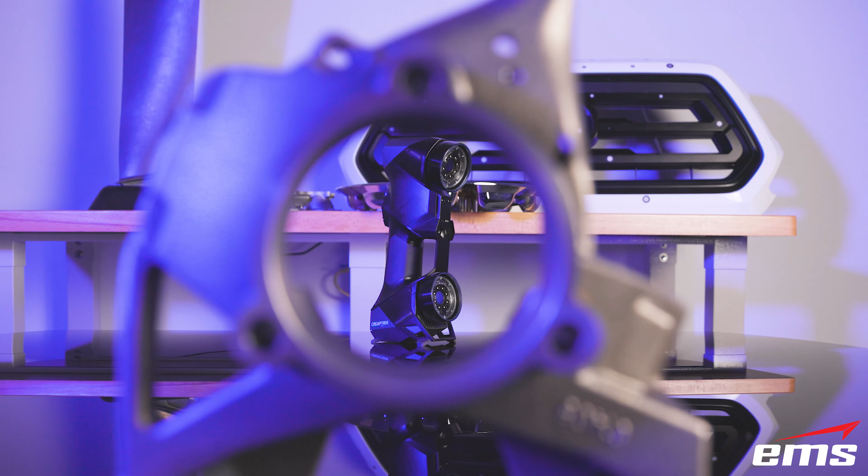So what do I mean by a real part? Well, if you go out on the internet, you see a lot of people doing demos and they're scanning widgets and statues and all kinds of stuff that companies that are doing manufacturing or design, they're not doing that kind of stuff. And the other thing is, most of them just show the scanning, they don't show the modeling or generating an inspection report. So what I want to do today is I want to show the entire process, and we're going to do it on this part.

And I call this a real part because this is out of a Jeep. It's a steering knuckle. And it's got some prismatic shapes, but then it has a lot of free-flowing organic shapes, and those have to blend into some of these planes and cylinders and so forth. So it's actually a pretty tricky part to model. And we're going to show you how to model this entire thing as a sketch-driven, feature-based, solid model, and then we're going to generate an inspection report with full GD&T.

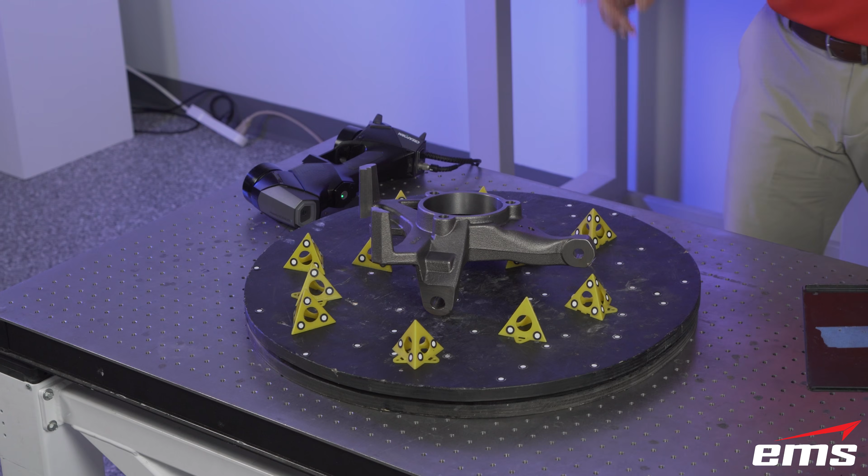Now, the other thing to make this even more complicated is we're going to change the manufacturing process. What do I mean by that? This part was forged or cast. We're going to CNC machine our part. So we've got to change up some of the things as we reverse engineer this part. So that adds another layer of complexity to it. But we're going to walk you through and show you what it takes to go from scan to CAD to inspection. And we're going to take you through that entire process.

So starting with the 3D scanning itself, we're going to use the Creaform HandyScan Black, but there are a lot of scanners you could use for a part like this. We're going to use the HandyScan Black because of the accuracy it provides and the ability to do dark and shiny surfaces on something like this. And we're not going to spend a lot of time on the scanning because we have lots of videos that show scanning, show this scanner in detail and other things. But let's just go ahead and start and get this scanning going.

I'm using this little Lazy Susan or rotary table that allows me to move around the part. All scanners or most scanners are line of sight. So we're just going to move around and get as much of this. And then when we're done, we'll flip the part over. The little yellow triangles are just there. This scanner requires targets, so as I lean down, it still has targets to see, but there's also targets on the table itself. But you can see it doesn't take long to scan this part.

It has this single line mode that allows us to get down into some of these smaller holes, and then I can switch back to the 22 line mode at any time. This is blue laser technology, so as I mentioned, very good on dark and shiny. And this scanner has a very good ISO certified accuracy. And again, if you want to see a lot of detail on this scanner, we have some great videos. But you can see the scanning does not take long on a part like this. That's pretty good. Now what I'm going to do is stop scanning. We're going to flip the part over and then scan the other side.

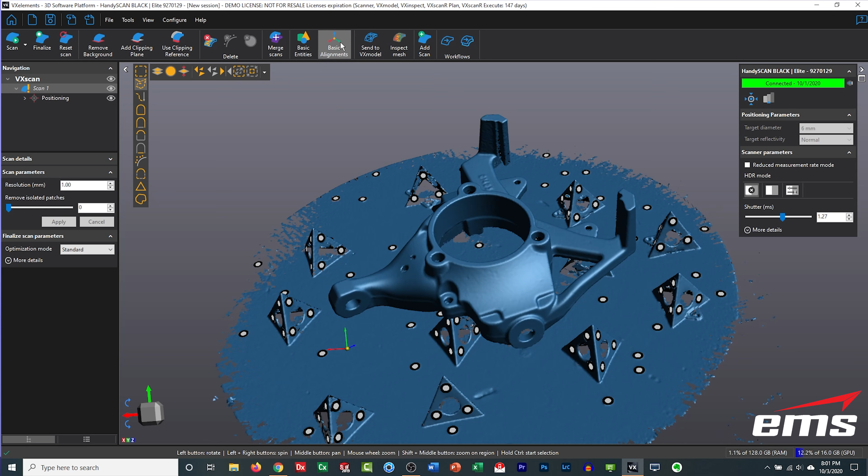So these triangles just kind of help hold the part from moving around. We don't want it to move around because we have no targets on this part. We've just got targets around the part. So then we come over here in the software and we just tell it we are going to add another scan. We do not want to copy the positioning targets because some of them got moved around a little bit. We hit start scan and off we go. Okay, and we'll get this side.

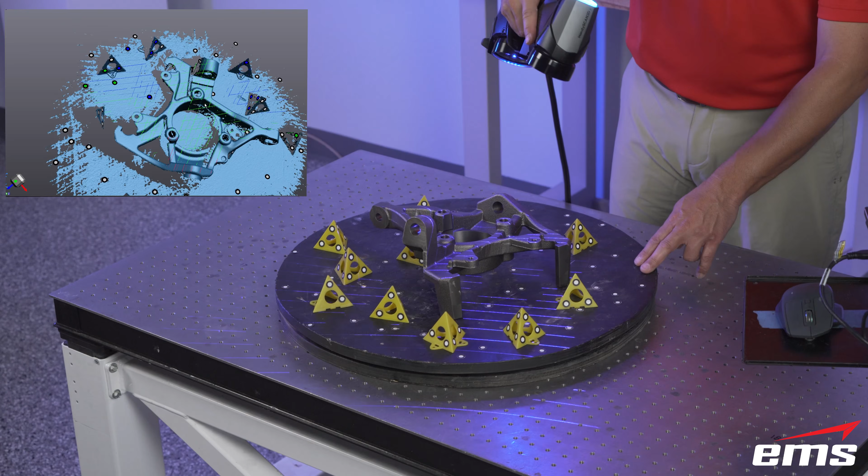And you can see there's some decent complexity on this part, especially on the other side. There's a lot of organic surfaces, but even on this side we've got some shape to it, because these parts are typically cast or forged and then machined. So there are some critical surfaces, especially all the machined ones. We want to make sure we get those really well and then get into, again, any of these holes in that single line mode. That's just going to be able to scan down in there deeper, especially the smaller they get.

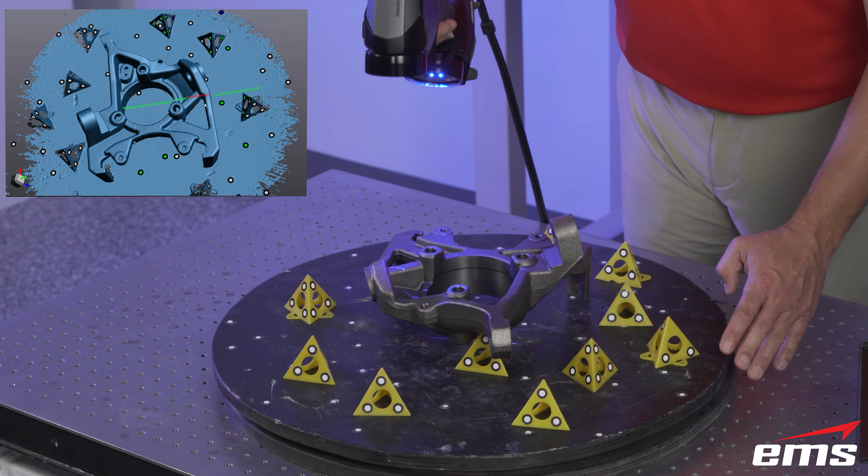But you can see, in a matter of a few minutes, we can scan this part. It's not difficult to scan, and that's the thing. These scanners nowadays are getting so fast and so good and so accurate that scanning has really become a very small percentage of a project. It might be now 10 or 20% of the project. The real work is in the modeling and generating the inspection reports.

So a part like this, which we're going to show the modeling next, is really where the work is. And then same for the inspection. Are you just doing a basic first article, or are you doing a very detailed inspection and have lots and lots of call-outs? That's where the real work is, and that's what we're going to get into next.

But we'll show you how to clean up this scan data, put the two halves together, because we've done it in two separate scans. We'll show that next, but then we're going to really focus on what does it take to turn this into a feature-based solid model that I can then use for downstream manufacturing applications.

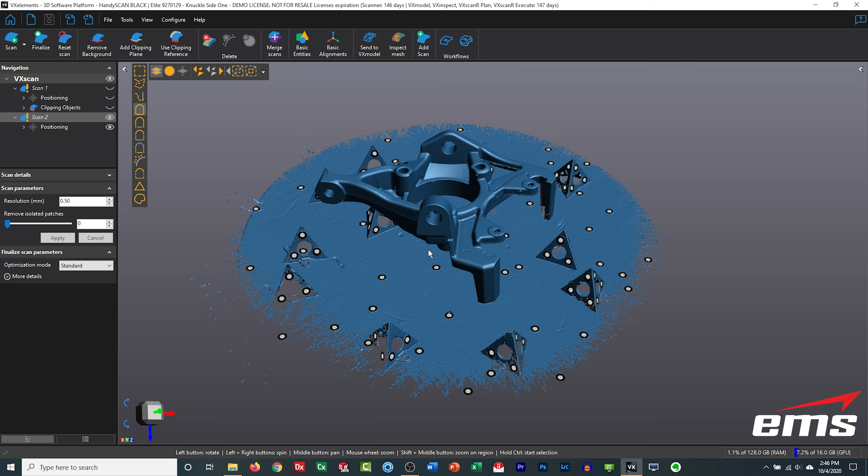All right, so here in the Creaform software, you can see our part here. First thing I want to do is get rid of all of the data we don't need. There's a command in here called remove background that basically finds the table, the flat surface, and it's going to create a clipping plane and clip that off. Okay? And now I'm going to just select the part itself, invert the selection, and then delete all the rest of the data.

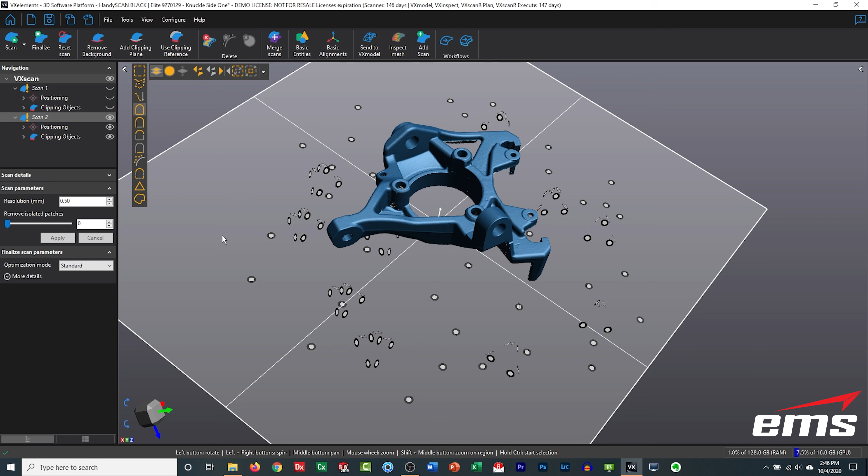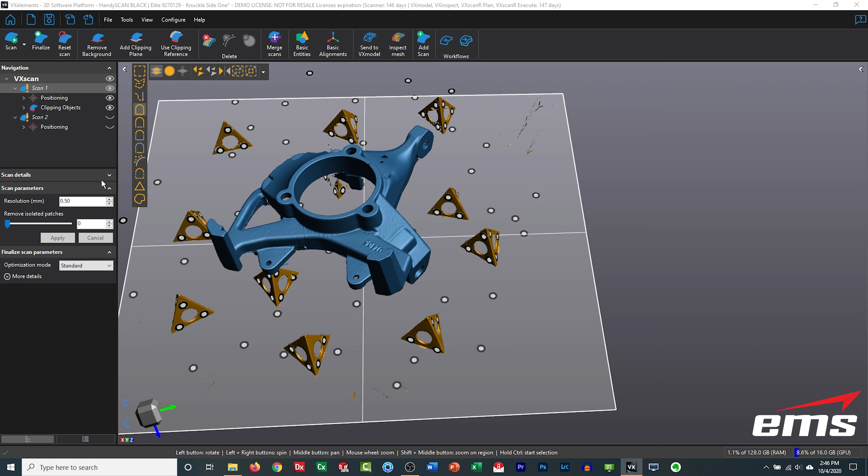And now we can get rid of that clipping plane. We don't need it anymore. That's just a quick way to get rid of a lot of the data. And let's go to the other scan. We've already created that clipping plane. So let's go ahead and select this, invert the selection, delete all that data. And then we'll also get rid of that clipping plane.

So now we have the two sides. So what we want to do is align them and then merge them. And it could be two sides, it could be 3, 4. It just kind of depends on how many sets of data. Typically it's a couple, but sometimes we have to do 2 or 3 depending on the part.

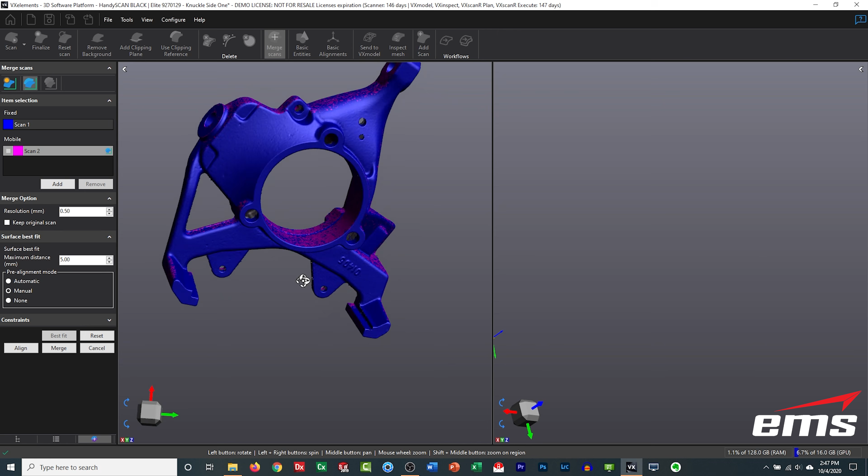So I'm going to use the manual method, and what you do is you just put them in the same orientation, and then you pick some points on each one. They just have to be close, and that just gives the software a head start, gets them fairly closely aligned. Now you do a best fit. It's going to go in there and really figure it out. You can see now we have a nice overlap between these two, and then we hit merge, and it's going to merge all that scan data together.

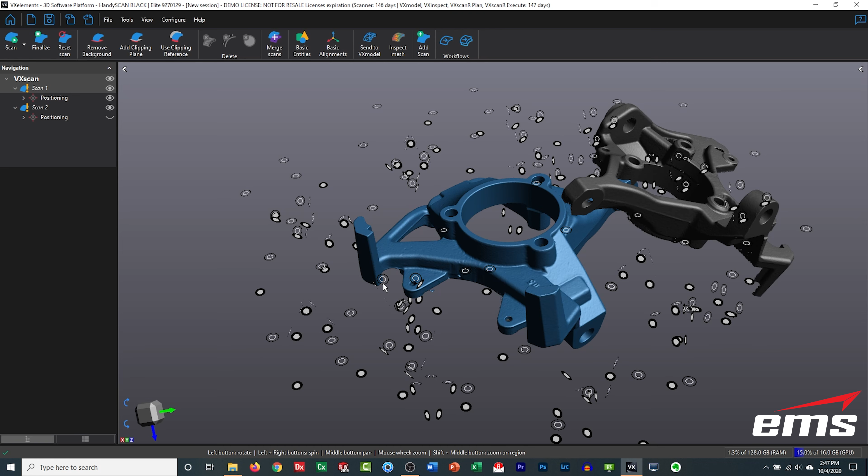So again, the time to scan and manipulate this data and get it to a point where it's ready to model does not take very long on a part like this. It's just a matter of a few minutes. Let's hide the original one there, and let's just hide our positioning target. So you can see we got very nice looking data. Only took us a few minutes, and this is about all we need. We're ready to go for the next step, which is the actual modeling.

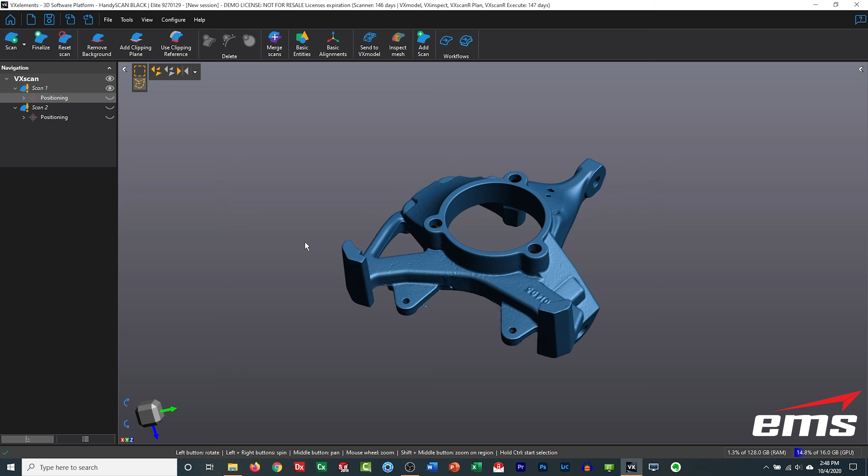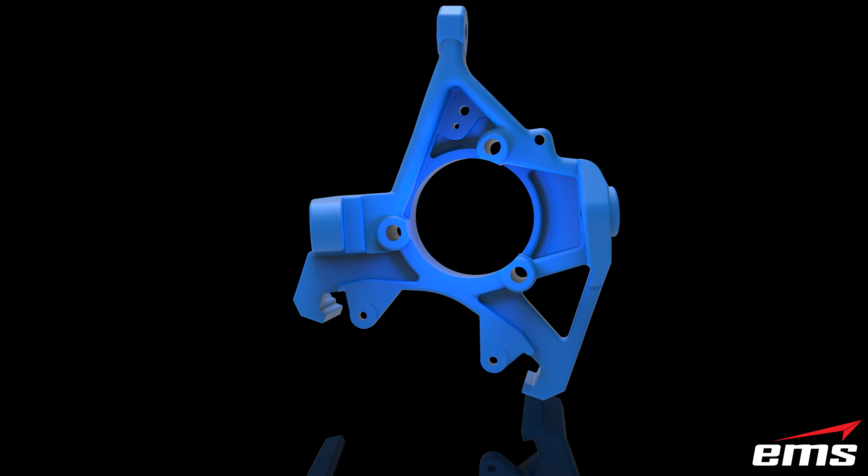So let's start by showing the 3D scan data, and then we're going to overlay the final CAD model we created. As you can see, there's some real complexity to this part. And here in blue now is the final CAD model that we're going to show you how we create. Back to the scan data, just to show the two models and how they compare to each other, so you can really see the complexity of the part on this side.

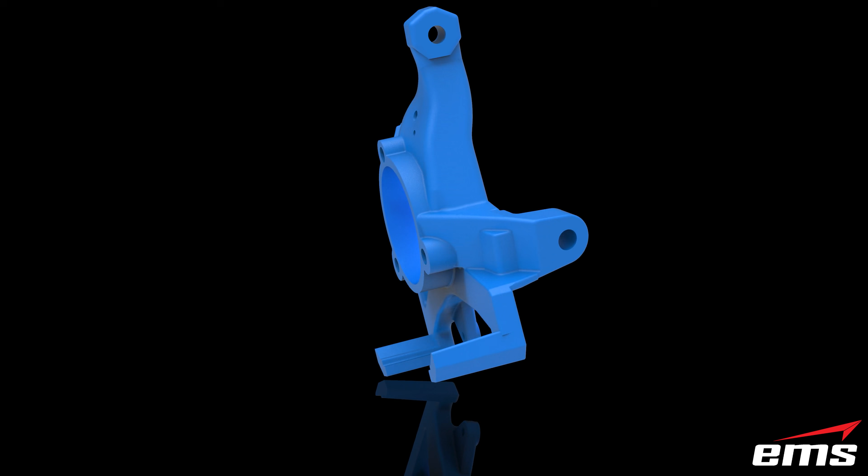Again, the final CAD model, feature-based solid model of this part, and then finally back to the scan data, just so you can see them over top each other. And we're going to go into detail on how we did this modeling. All right, so let's get started here.

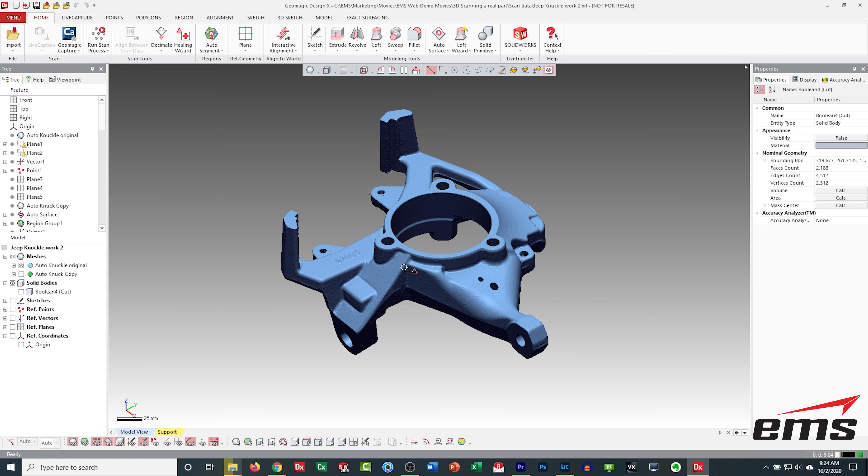Now, I am in Geomagic Design X, and this product is specifically designed for reverse engineering of 3D scan data. It's very similar to a SolidWorks or a CATIA or an Inventor or a Siemens NX. It does both sketch-driven, feature-based solid modeling and surfacing. The biggest difference is it has this front end to work with scan data, because scan data, as you see here, is nothing more than triangles, okay?

Basically STL data. So if you zoom in, you can see what this is. It's just triangles, okay? So it's a very stupid model. It has no intelligence to it, okay?

Now, the first thing I'm going to do is show you the wrong way to design this part, because we see a lot of videos and demos out there, and for a part like this where you have some very organic shape, but yet have prismatic shapes, there's a certain way people tend to model those. They do it that way because it's fast and easy, but in our opinion, it's the wrong way to do it, okay?

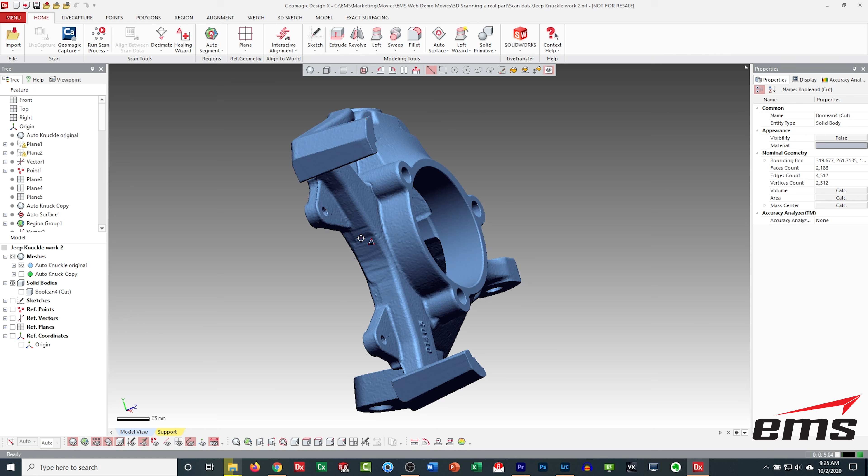So if you look at this, this part is either cast or forged, and it's pretty obvious because you can see the parting line. All the walls have draft to them. You can see tooling marks. Maybe the tool's worn out in certain areas. You can see imperfections. We've probably got a part number on here. This is probably where the riser or the gate or a sprue was cut off in post-processing. So this part is cast, and then they'll machine in the holes and some flat surfaces.

So, fairly typical, okay? So what I'm going to do is roll back in the tree to this point here, and I want to show you how most people would model this. So we're going to roll back, and let's turn on another copy of the mesh, and you'll notice something different right away. All the holes have been removed and it's been filled in, okay? This is still scan data, but a copy was made and the holes and the sharp corners were taken out.

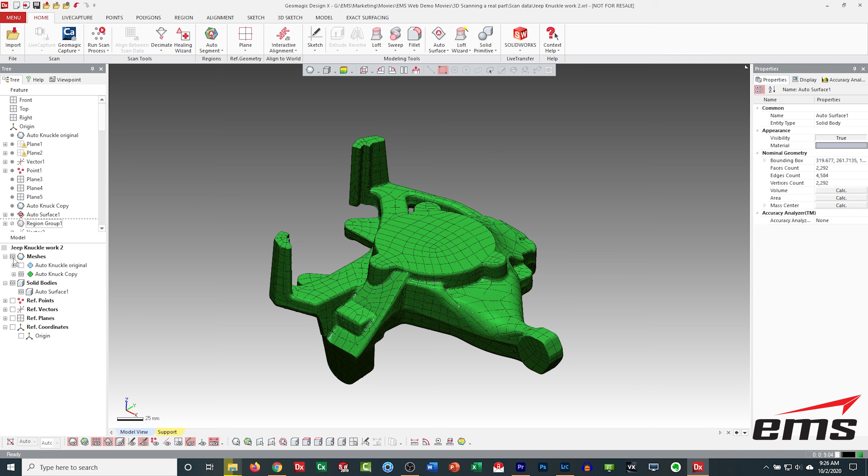So for example, let's turn back on that raw scan data and then this modified version of the STL file. So what they'll do is make it like this, and then auto surface it. Let's turn the mesh off. Okay, so now, instead of 3-sided triangles, we have 4-sided surface patches. You look over here in the tree and it says it's a solid body. It is technically now a CAD model. But there's no associated sketches or other items here. This is just one big, dumb solid, okay?

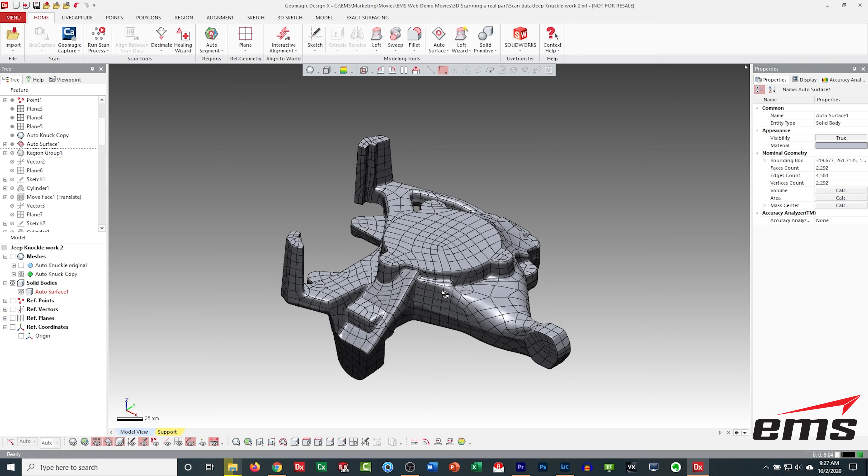So yes, in a sense, it's better than just an STL file because I could export this now as a STEP, IGES or Parasolid model. But again, there's no intelligence. If I want to come in and change this surface shape here or take the draft out, you can still even see the parting line. Let's turn off the edges here so you can see it. So again, bring the mesh back, turn it off. It's pretty much an exact replica.

And when we reverse engineer something, we're scanning a manufactured model, but we want to reverse engineer back to the design intent, the original design. And that design probably didn't have the draft in it, didn't have the parting line, didn't have the tool marks, didn't have the cutoff and that kind of stuff. It was a CAD model.

Because if you're going to get this manufactured again, maybe you're changing your process. In our case, we're going to CNC machine this out of billet. We're going to make some modifications to the design a little bit. So we don't want draft on there. We don't want parting lines. We don't want all these imperfections in the model. And if we're going to make changes to it, it's going to be very difficult using this modeling method.

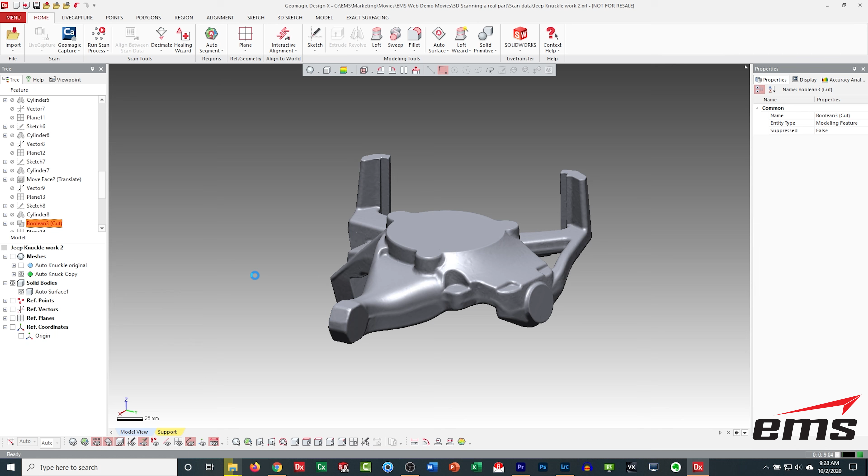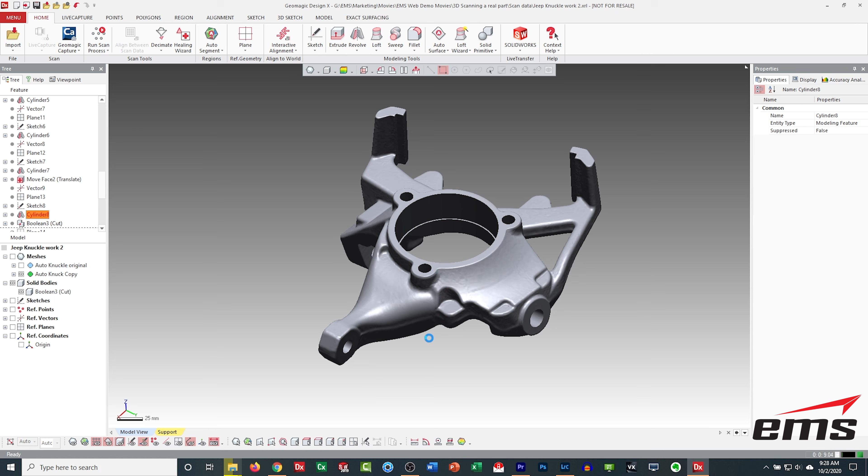So let's just carry on through the tree a little bit here just to show you. I'll roll forward a bit and you can see what this process would look like as we continue through it. So they basically would create cylinders or sketches. There are a few sketches in here, and then they're going to Boolean or cut those out. Let's roll all the way to the end. And then this will be what the final model looks like. So just really adding in the holes and everything.

So again, let's turn back on our mesh. Let's go back to the original mesh, and you can look at it. The blue is the mesh, and the gray is the final CAD model, okay? So you'd look at that and say, yeah, that's great. That's a perfect replica of the model. But that's not what most people want.

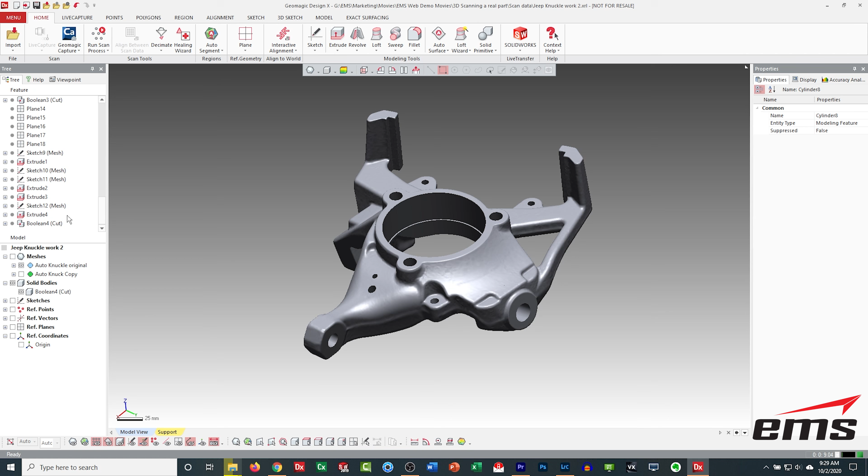This model, other than the holes and a few flat surfaces, there isn't much to edit here, okay? And if you look at the whole process, we have about 12 features, 12 sketches on here. So, you could model this in a few hours.

But again, the problem is if you send this to somebody and then they want to make changes to it, you really can't, okay? So in our opinion, this is the wrong way to model, but a lot of people do this because it's fast and easy, but you're really limited, and quite frankly, it's still the manufactured part. It's not the design intent, the as designed.

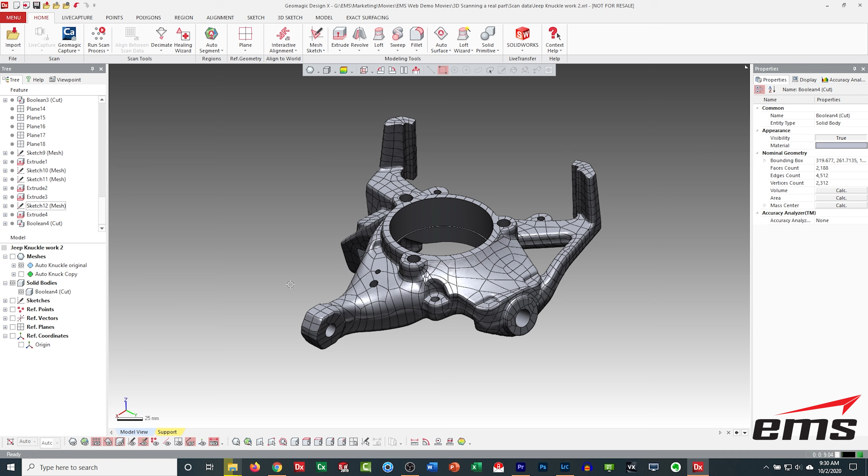And even if you were to, let's say, sandcast this again, you could send this to 2 different manufacturers, and they may have 2 different methods of creating the parting line and setting up this part, but you've kind of already baked that into here because it's to whatever the original process was. So again, this is, in our opinion, the wrong way to do the part.

So now let's show the right way to model the part. So here is the finished model done more of the traditional sketch-driven, surface-driven, history tree modeling as you see here. And you'll notice right away big differences, okay? Let's roll this over so you can kind of see it. So still, it looks pretty much like the original or the scan data with some differences.

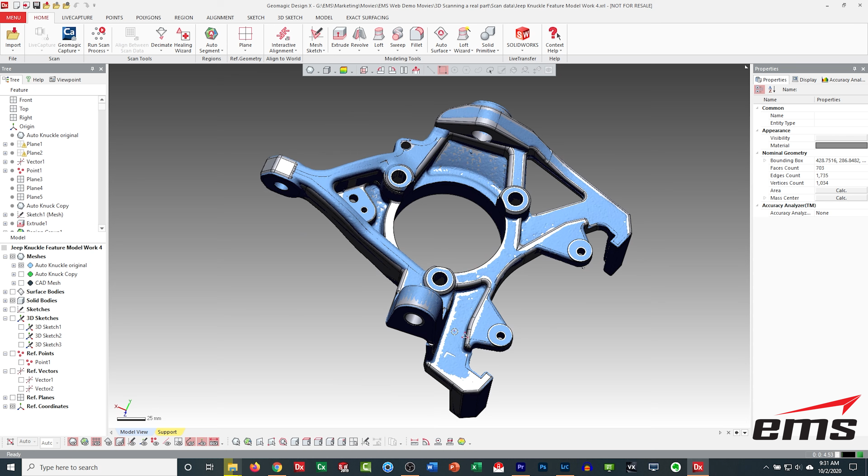So let's bring on the scan data. So right away you'll notice we don't have parting lines. We have straight walls in here. We have everything driven by sketches, okay? So let's roll this over and you can see it. Now, a couple things. One, all the holes and all the critical surfaces are right on.

And then some of the surfaces we made, for example, this surface here, it still has the curve, but we made it nice and smooth. Same with here. I mean, we probably have to follow our limits to where this has to fit in the vehicle and how much clearance we have. But we can smooth these surfaces out. We can make things the right way.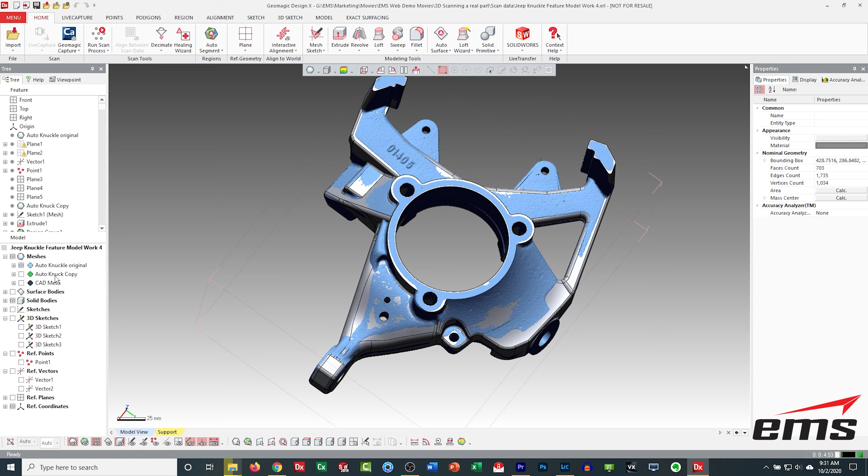So again, let's turn off that scan data. We've taken out, for example, the part number. We had where this part was cut off here. All those imperfections are gone. And everything now is sketch driven.

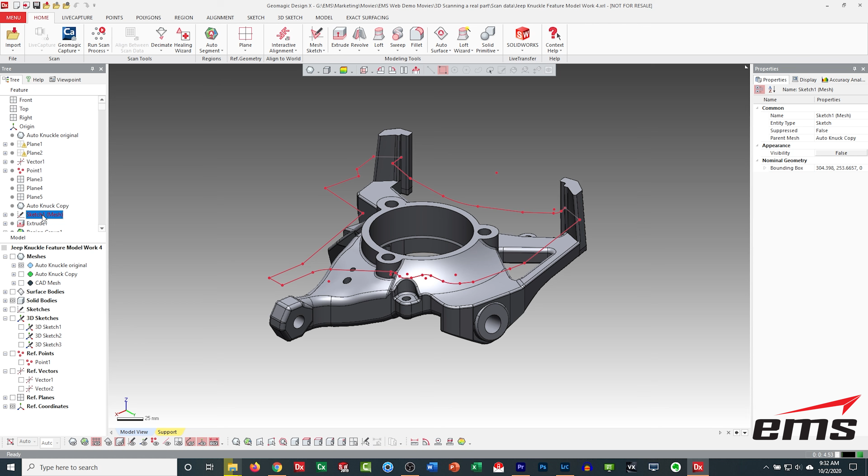So let's walk through. I'm going to just do a real quick walkthrough of this part as far as all the features, and then we'll go into a little more detail. But I want to start by just showing you all the features and what it took to model this part. So what I'm doing is just stepping through the tree, and this will highlight all the sketches that were created to build this. So as you can see, it's a lot more involved.

So instead of going from a few hours to model this, it could potentially take a few days to model it. But what you end up with is a full-blown history tree with every feature associated to a sketch that you can roll back and make edits to. So if you don't like a certain feature, you can go back to that sketch, make a change to that sketch, and it updates the model. And in our opinion, this is the correct way to do it.

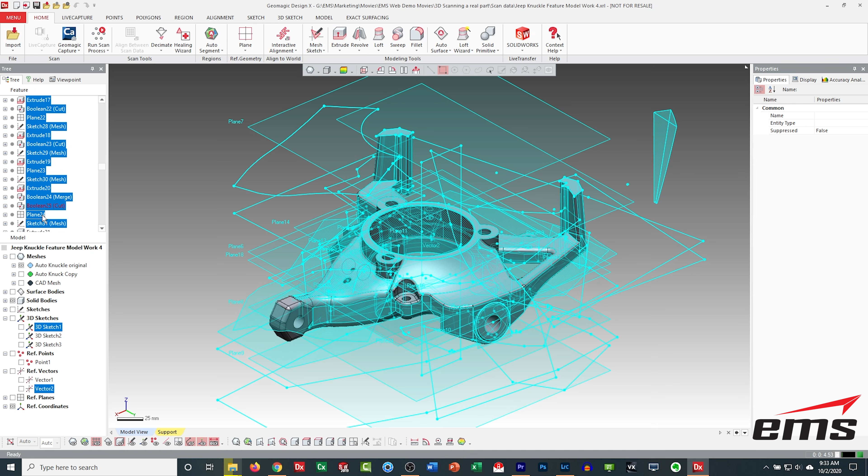So instead of having 12 sketches, we ended up with over 50 different sketches or steps, we can call them, in this model. So yes, it took a lot more time, but it's the right way to do it. Because we get calls from people, or we talk to people that have had 3D scanning done in the past, and they haven't necessarily been happy when they're doing a part like this.

And that's because somebody did the first method that we showed, and they send that to the customer, and of course they want to make changes to it or change it for a different process, and they basically end up with a model that they really can't do anything with, and it's full of all the manufacturing information, draft, parting lines, things like that, tooling marks like we've talked about, and they can't take those out. They can't really edit the model.

So this kind of looks like spaghetti, but you get the idea. This is what it takes to model something like this correctly. And as I said, this could take a few days to do, but this is the right way to do it. So we'll break it down a little more and actually show you step by step how we end up with this final CAD model, and it'll look better than just this spaghetti on the screen.

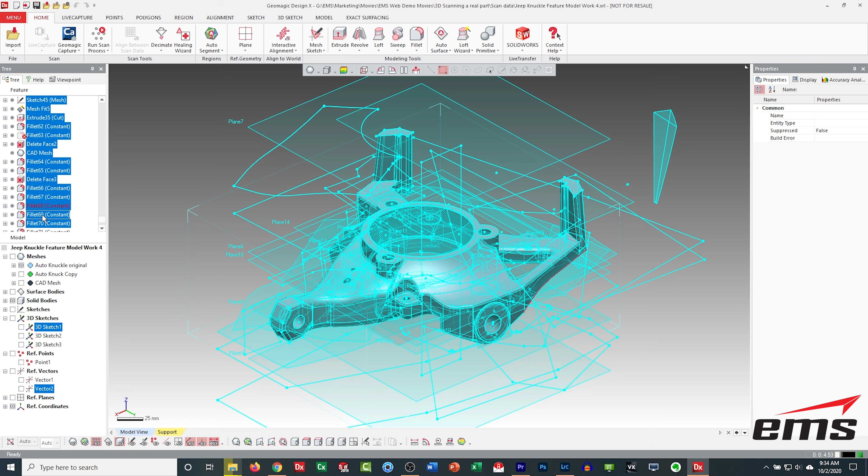So to set up what you're looking at here is we have a top and bottom view of the part, and what I've done is just done a screen grab at different stages as we go along. So you can see the first sketch here we've built, and then we're going to extrude it.

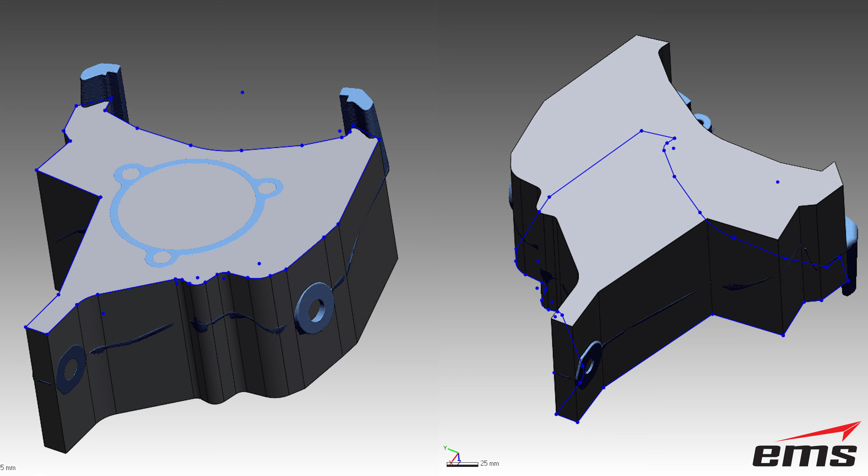And there's really two ways to build models. You kind of build up or kind of tear down. And for this part, tear down is the way to go. So we kind of make the major shape, and then we're going to start chipping away at it and cutting it back just because of the shape of the part. So the cylinder in the middle there is pretty straightforward.

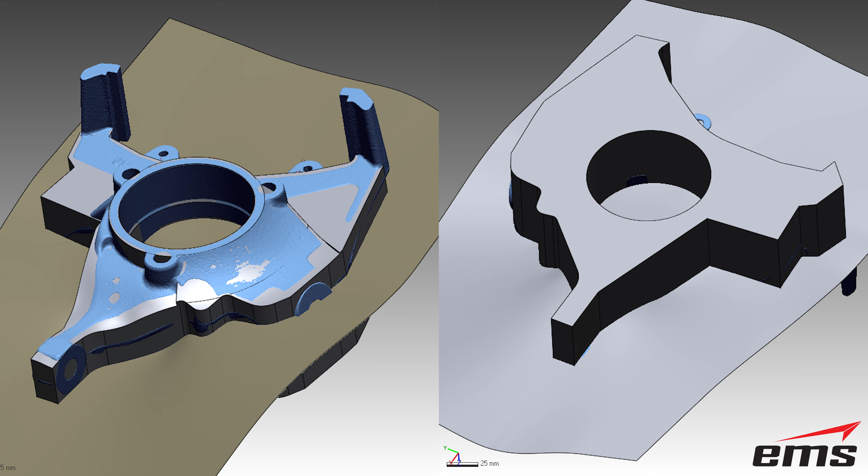And then we're going to cut sections or do mesh fit surfaces and then extrude up blocks and then cut them away. So you can see I've got all these organic surfaces. I'm fitting surfaces through those areas, trimming those surfaces, and then extruding it up and then cutting that block away. So you can see I'm doing all of the really organic curved areas first and making sure they all blend together, and then we'll start working on some of the other stuff.

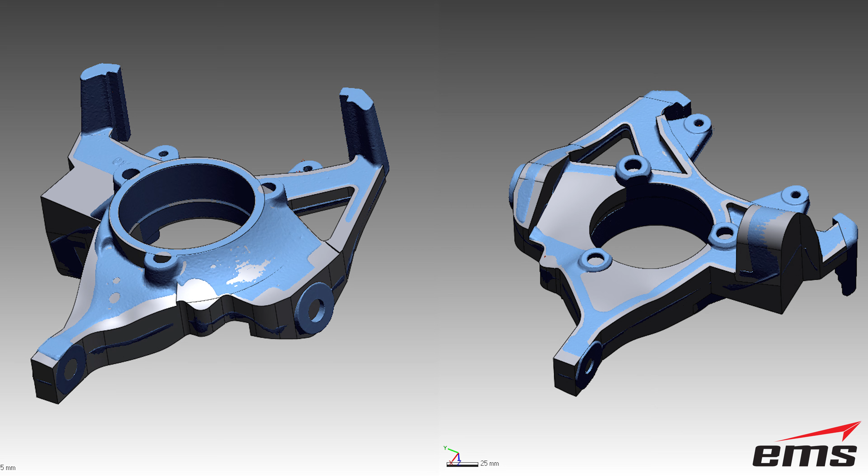So it takes a little bit of work to do each one of these steps. And as we mentioned, there's about 54 steps or so in this whole process. But we found for this part the best way to do it. You can see I'm making my walls vertical. I've got nice smooth flowing surfaces, and of course, I can control all of this by going back and either editing those sketches or even editing those surfaces I'm building. So I have a lot more control of this model.

Plus, I have the ability to make changes or to omit things that I don't want or need in the model. So I have much more control, and I can go back to the design intent of the original model, even though I've scanned the manufactured part. Again, I will make sure the key machined surfaces and holes are very accurate, but then I have much more liberty on the rest of the part. I probably can't deviate too much because we have space claim requirements in there or limitations, so we've got to stay pretty close.

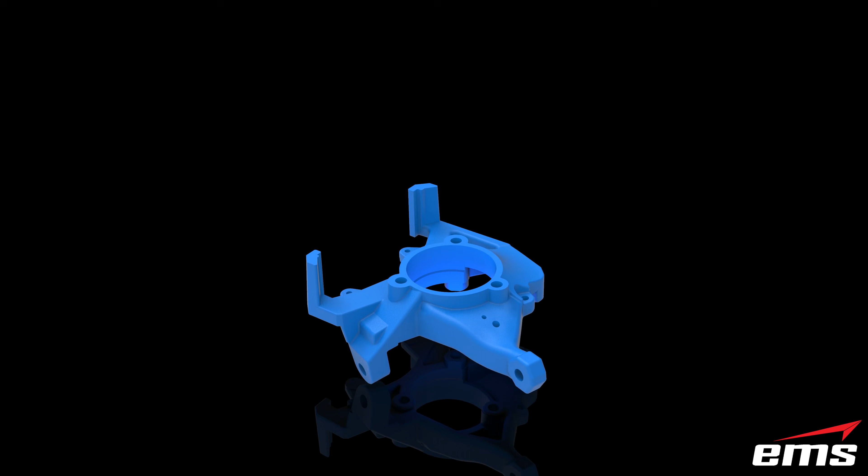You can see here I'm adding in all the fillets and doing some of the final steps here, but this gives you an idea. Then we run the accuracy analyzer to compare it back to the scan data to whatever tolerance we want. You'll see some slight differences, but we're okay with those because they don't really affect anything. And so there's the final model here. We'll spin this around so you can see it, but it's a much better looking model. It looks more like a CAD model. And we have a lot of editing capability if we do want to go back and make changes, but we can export this now in any CAD format.

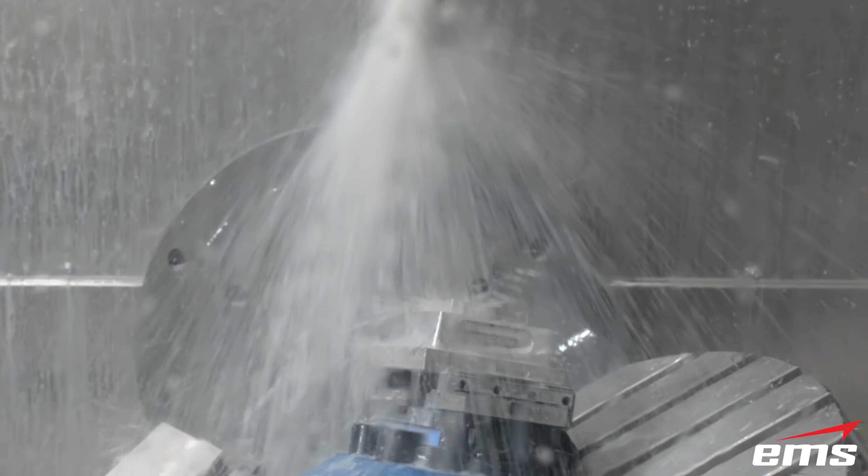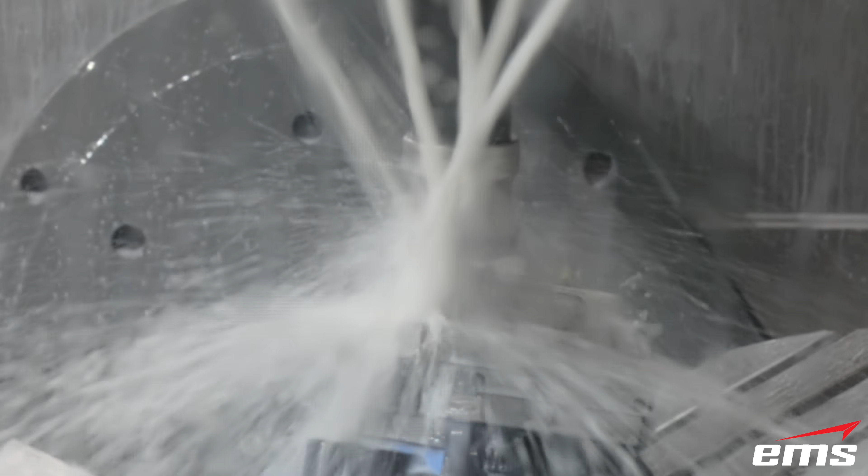So our next step is to send this out to get CNC machined from billet material, because again, we have changed our manufacturing process. Now, once the vendor gets the part machined, they're going to send it back to us. We're going to scan the part again, and then we're going to compare it to the original CAD model. So this will be our first article. We want to make sure it's right before they machine a whole bunch of parts. So we're going to show you how to set up and inspect a part from 3D scan data.

All right, so we've scanned the part again, and here now we are in Polyworks, and this is what we're going to use for the inspection. Polyworks is a very powerful inspection tool used heavily in automotive and aerospace. So the first thing we do is bring in the CAD model that we built from the scan data. We'll import that in. And then once that comes in, we are going to import the scan data. And again, this is the new scan data. We've got the CNC part back that was machined. We've 3D scanned it again, and we're going to import it.

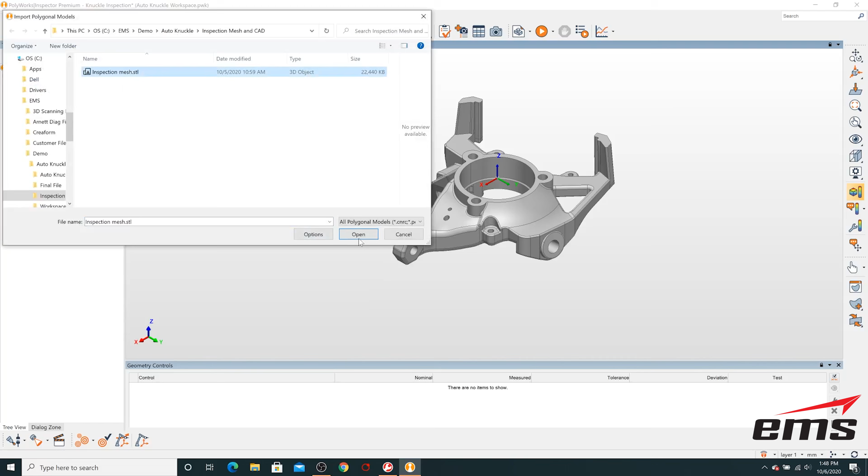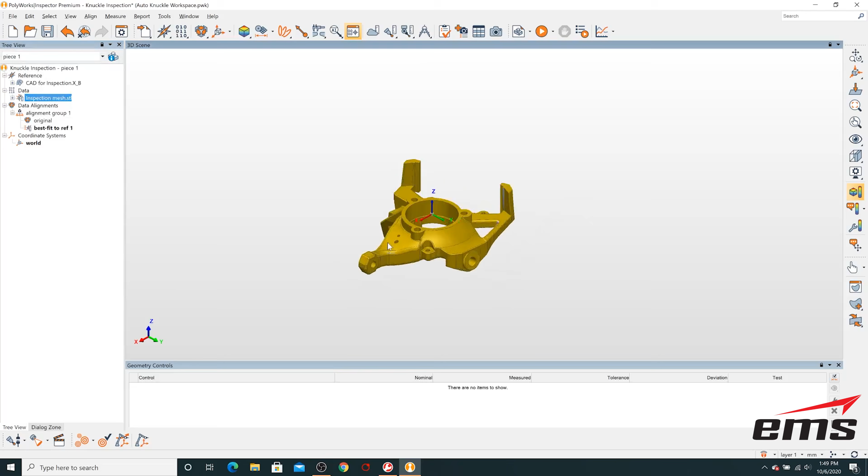Now, first thing you notice is they're not in the same coordinate system, because whenever we scan something, it's not in a coordinate system. So we're going to do a quick alignment or a best fit, and that'll just get them on top of each other. And theoretically, they're now aligned. But for most machined parts, they use a datum alignment system. And this goes back to the days of the CMM world, where you had to fixture a part down, and typically you'd have an ABC datum.

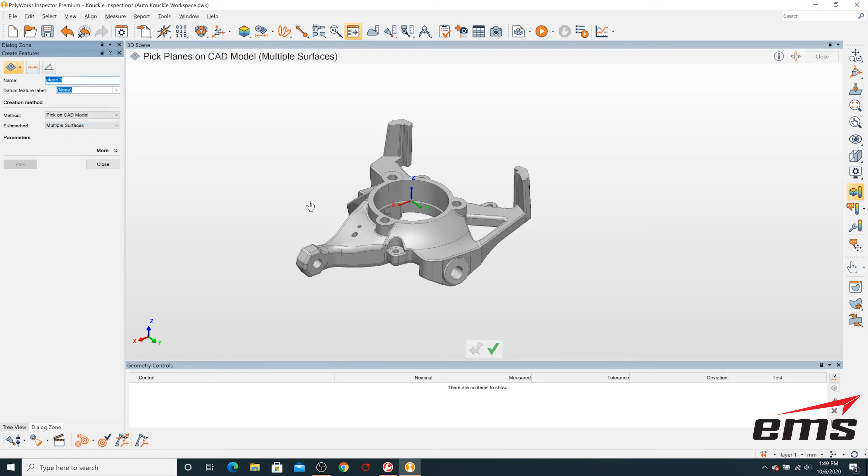Your A datum is usually your primary, your most important datum, followed by B, your secondary, and then C. And you're basically locking the part down so that it can be fixtured, and then you inspect in that datum alignment. But theoretically, you could use best fit, and there's lots of other alignments.

Now, our 3 holes on the bottom are the most critical mounting point, so that's going to be datum A. So we're going to want to make sure that we lock down datum A, and it's actually going to shift the scan data and prioritize datum A. So it's going to match up that scan data as closely as it can to that bottom datum.

Then the second one will be this side here, and we'll call that datum B, the side of this kind of arm sticking out. So that's going to lock down one of the other axes. And then finally, this hole in the back will be our third datum, and that's going to lock down the third axis, so to speak, and position it. So we're just telling it we're going to use the circle center, and we're going to create our datum, and then actually tell it to now align to that datum.

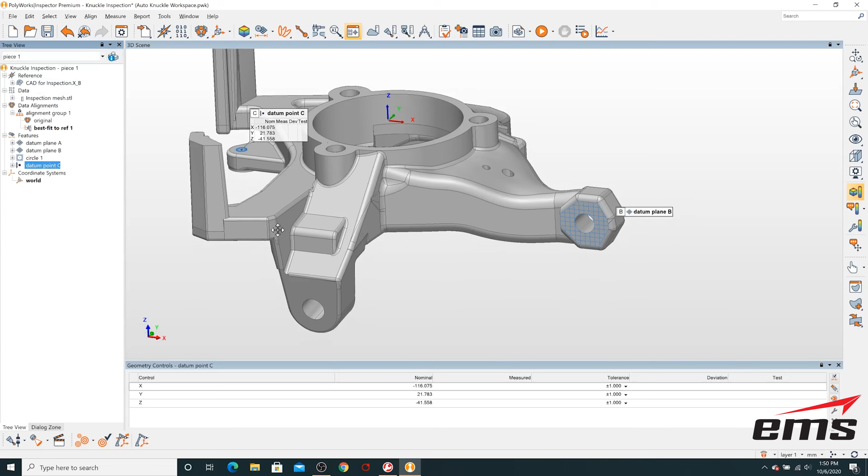And if you don't know much about datum alignments, there's plenty of videos out there. Same with GD&T. We're going to show a lot of GD&T, and if you're not familiar with it, there's lots of videos on what is GD&T and how it works. But it's basically a pretty commonly used measurement system for a lot of manufactured parts.

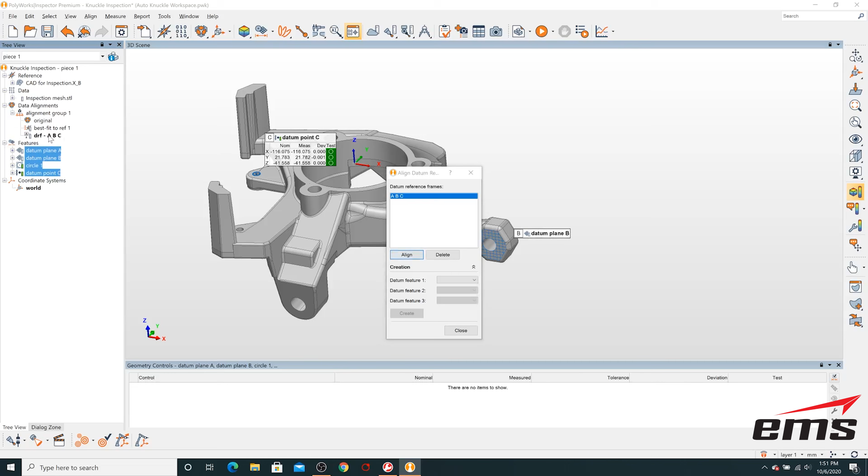Okay. So there we're actually going to do the datum alignment. So we're going to pick the references. So again, feature A, feature B, or datum A, B, and C. And we're going to tell it now to actually move the scan data to align to that. So that's what we have here. And then once we have that, you can see the values from that alignment. And there's our mesh, so you can see how it kind of lines up on there, okay? So again, priority will be that bottom.

Now the next thing we're going to do is a quick color map, heat map people call it, color deviation map. This isn't something you can really quantify with real measurements. I mean, you kind of can, but it's really just a quick look at the part. We can adjust the tolerance range, so we can just do a quick look at this part and see, hey, are there any issues, right? So we set a tolerance, and everything in green should be in that tolerance.

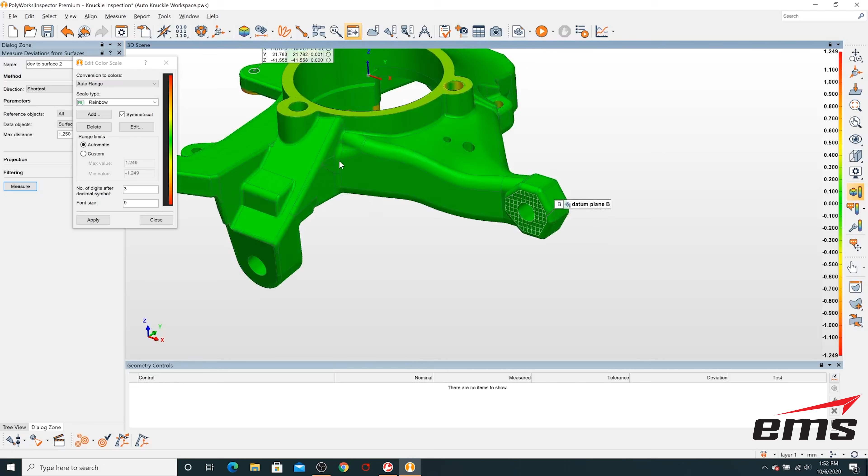But if you look at this top surface here, it's approaching yellow. So at least that's telling us, hey, there might be a problem. We can see some other problems. Now, some of these problems may not be in critical areas. We may not care. But if you notice that one hole there in the back, that's yellow, and we should not have that. So at least we know with this quick check in this datum alignment, we may have some issues. Once we get in the GD&T, we can further explore that and validate if there's issues.

But the color map is a nice quick kind of go, no-go check. If we saw like a ton of red, then we'd know, maybe the whole part is out. So that's just something to be aware of.

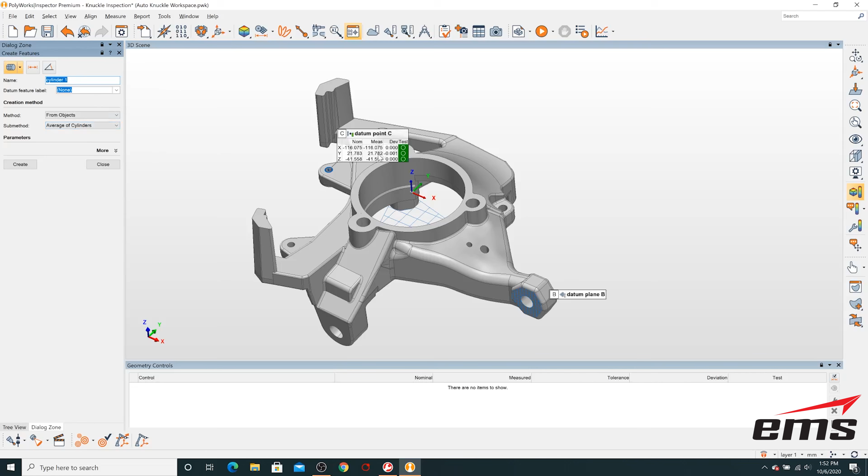All right, so now we're ready to actually start putting in some of our GD&T information. And the first step is to define the geometry that you want to then apply GD&T to. So the first thing we want to check is the holes. Those are some of the most critical surfaces on a part like this. So we're going to pick all of the holes, or cylinders really, as you see here. We're going to pick all those to define them, and then we're going to apply various different GD&T callouts to all of these holes, because again, these are usually some of the most critical items.

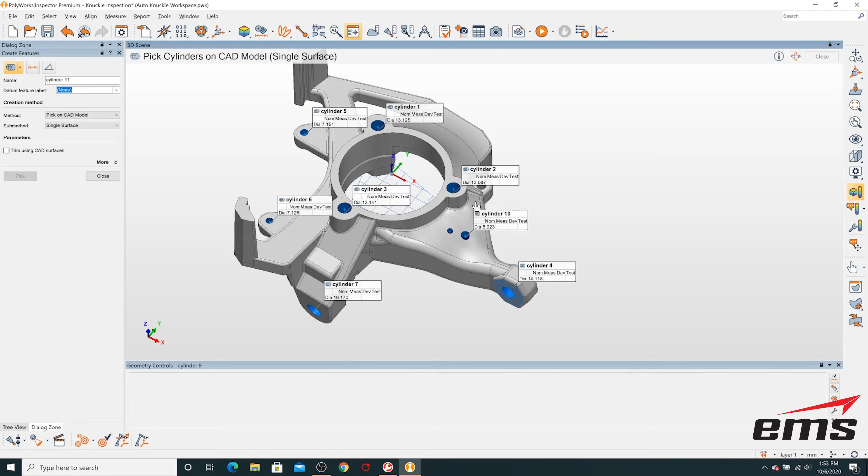If these holes are not in the right position, or they're not round, or not cylinders, you could have issues. So once we pick them, what we'll end up doing here is telling it what tolerance, and you may have different tolerances on different holes. So the first callout we'll do is positional tolerance. That's one of the most critical ones. Is the center of the hole even in the right spot? So we're going to pick these first three, this bolt hole pattern at the top. That's one of the most critical, and we'll define its position.

And the tolerance on this one, we're going to set at 0.05. Now keep in mind we are in millimeters, so that's 50 microns, or about 2/1000ths of an inch. Okay, so we'll define that. You can define it as a bolt pattern or bolt circle as well, and we'll define some of the other ones here. Now this starts to become a little bit repetitious, so we'll let some of this run here at normal speed, but then we'll speed it up.

So we're going to define all the positional tolerances first, like I said, and they may have different amounts, different tolerances. You can see here this one's 0.1 or 100 microns, or about 0.004 of an inch. Now, what determines these tolerance amounts and different GD&T items we're adding on? Well, it's really either the designer or the machinist, or a combination of, but somebody who understands manufacturing and also understands how this part is being assembled with other parts, and what is critical and what is not. You don't want to over-constrain, have a super tight tolerance on something that really doesn't matter, and at the same time you don't want a loose tolerance.

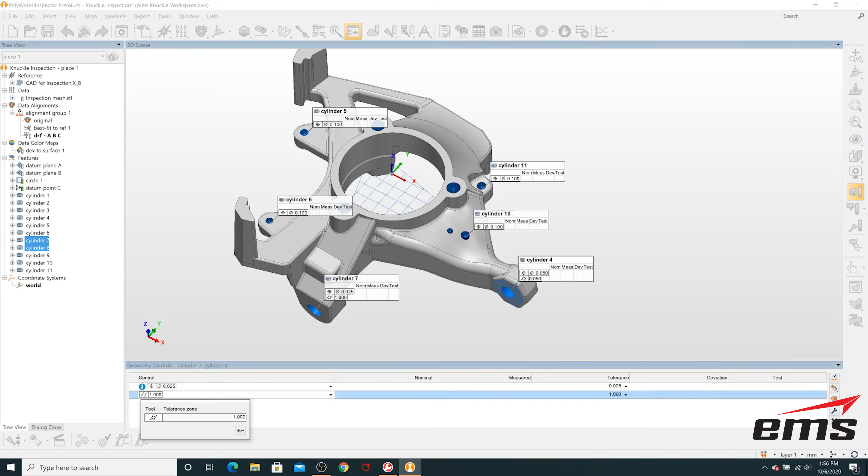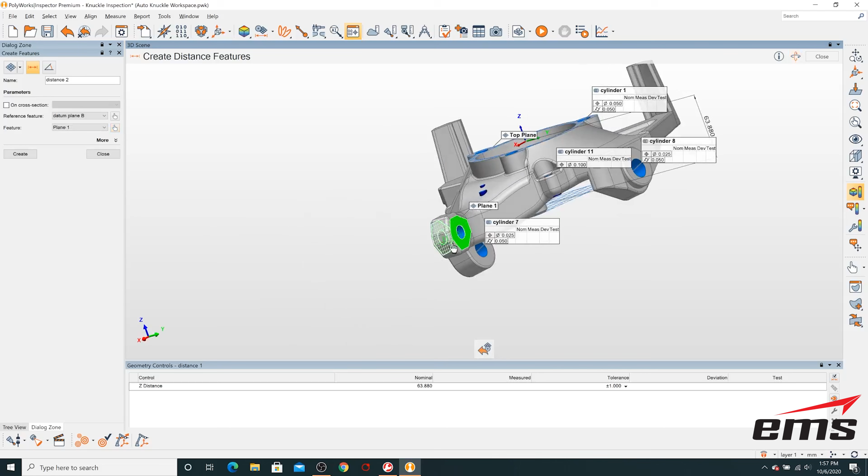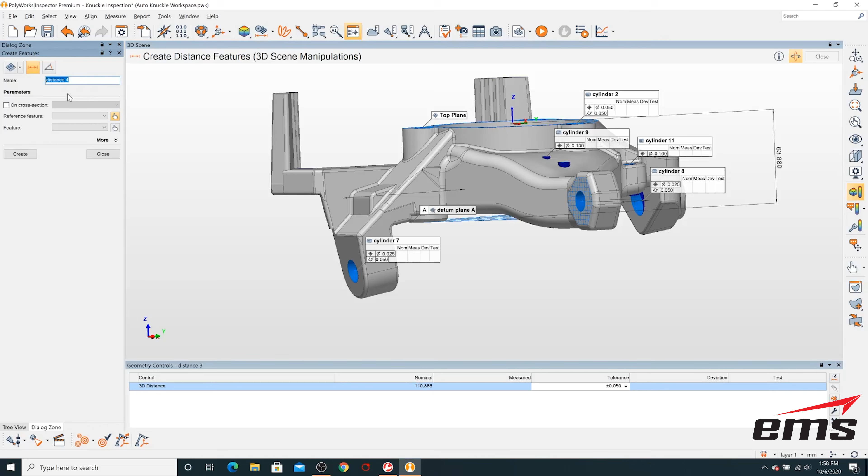So we're going to show positional tolerance. Then we're going to check cylindricity. That's looking at it as a 3D cylinder. Is it truly round all the way through the part? We can also check concentricity. That's where two of these holes have to line up perfectly with each other. We're going to pull some dimensional measurements from one side or one plane to another. We want to check the measurement between a couple of the holes on here. So we basically just go through and assign the different callouts, put in the values, typically the tolerance, to it, and then we're going to run a report and take a look at it.

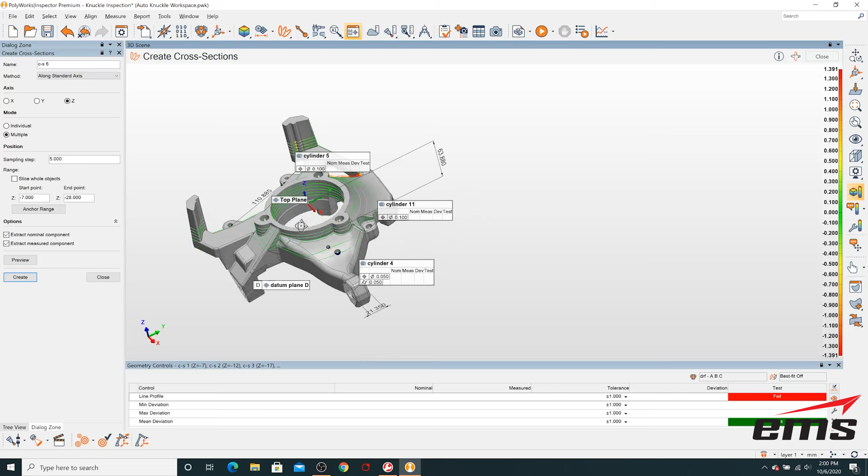Okay, so it gets a little bit repetitious, but even a simple part like this could have 50 callouts on it, again depending on how many features are on here and how critical they are. But certainly all the holes, or most of the holes, are critical. Some of the faces from one side to the other, the machine faces on this kind of main hub, they have to be accurate. Some of the other faces slot into other things. So again, they have to be within a tolerance as well. So that's the general idea.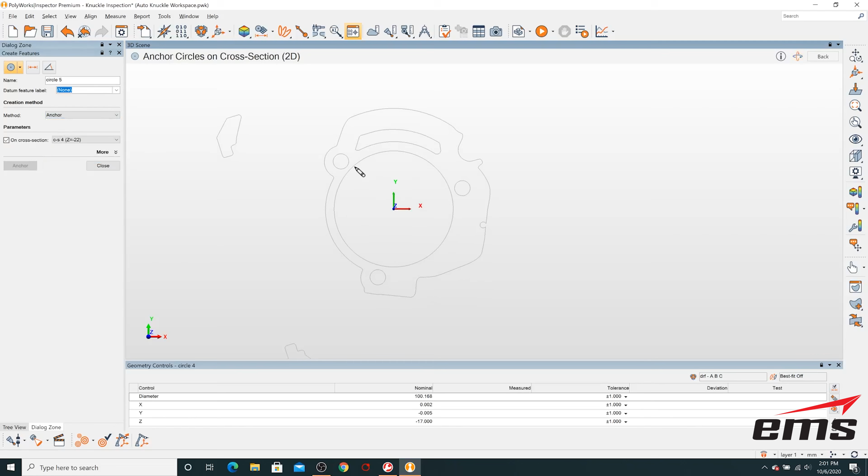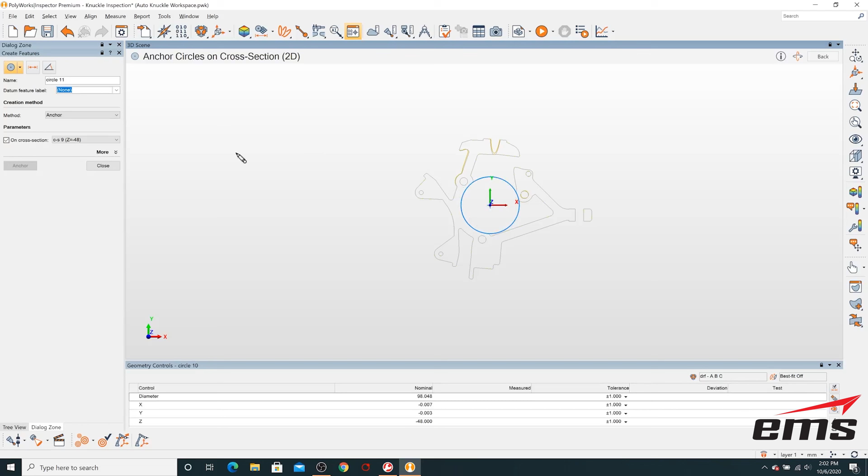And general rule of thumb is each callout takes about a minute. So if you had 50 callouts on a part, you'd be looking at roughly an hour. We've done parts with hundreds of callouts on them, and very advanced datum alignments, multiple datum alignments, very complicated alignment systems. So you could spend a day just building the inspection report. Now the good thing is, once you build this report, you don't have to build it again. So for example, maybe we got 10 of these parts, first articles from the machine shop that we worked with. So we said, hey, give us a short run of 10. Once we build this report, then we just have to scan each part and then load it in and run the report again. So we don't have to rebuild this.

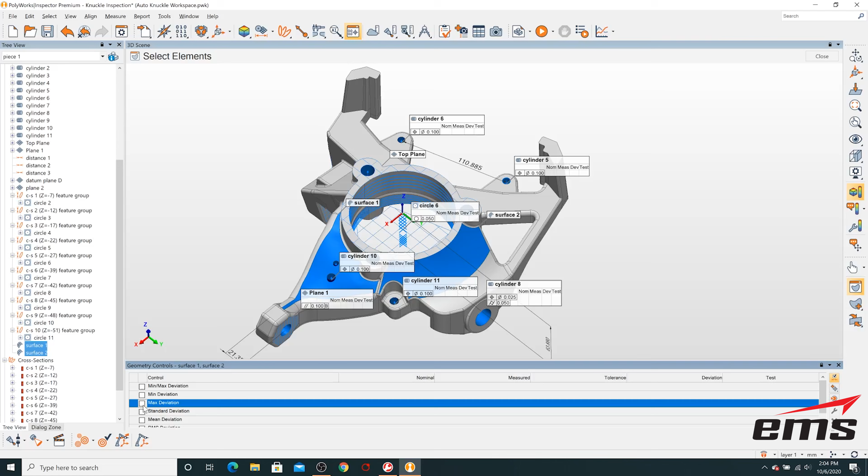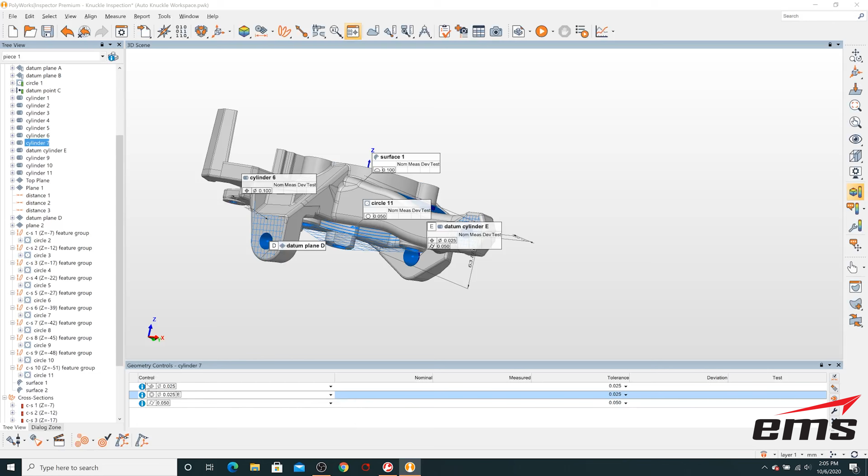So you kind of create the recipe to start, and then, assuming it's the same part, you just scan each one. You save that scan file as a different name, and you can actually batch process, have it load each one in automatically, generate the inspection report, and spit out the results. That can be all done with a push button. But you definitely have work up front to build the report like you see here. It does take some work, and it takes some knowledge to understand GD&T and manufacturing processes and how parts assemble together. Because if this part is off, theoretically, everything that attaches to it is going to be affected. So it's critical that we get a part where these key callouts, these key locations and key dimensions, are within the tolerance that we have specified with the CAD file and the drawing we sent over to the CNC shop.

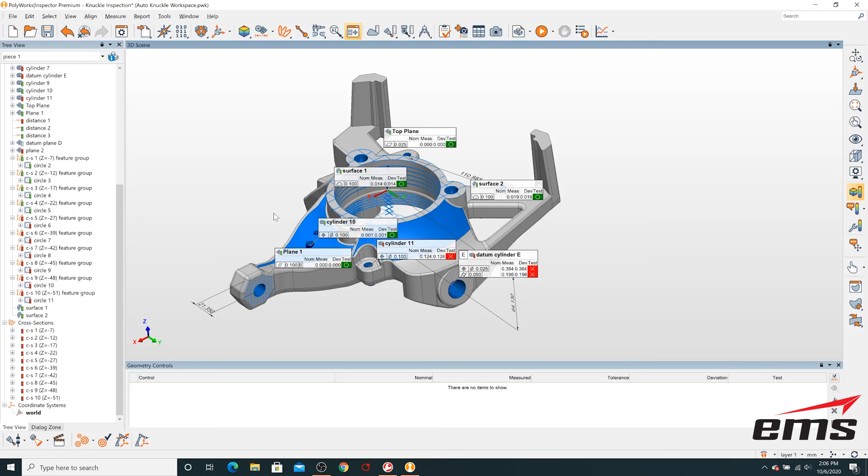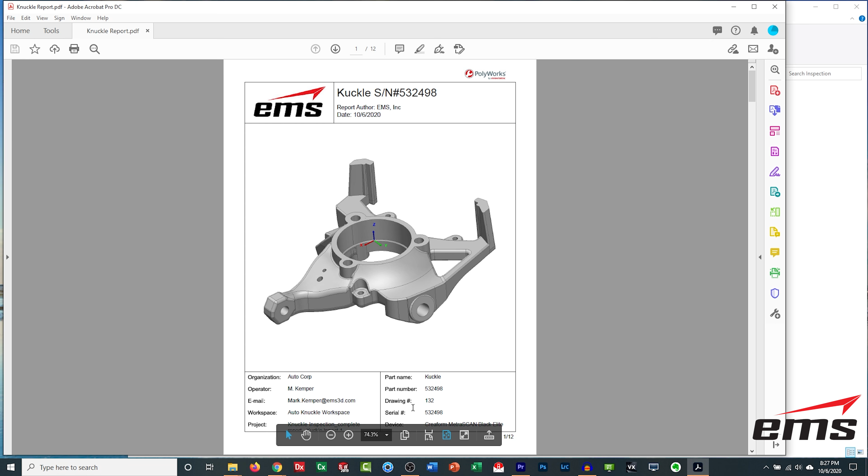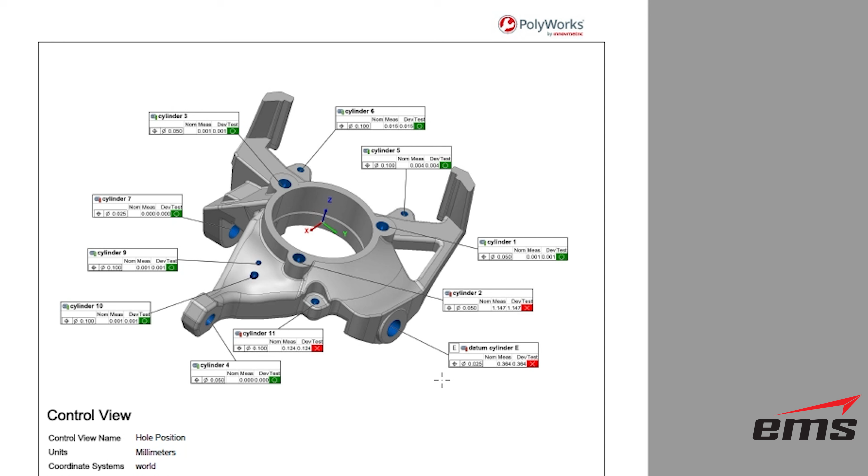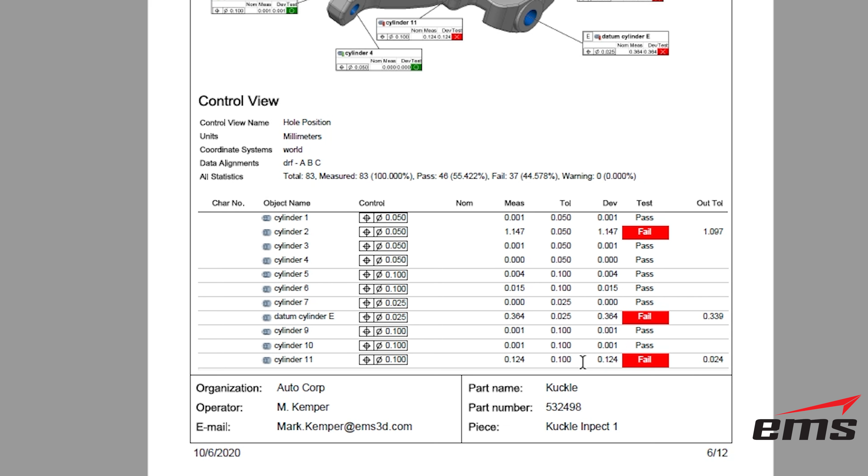Here is all of our positional tolerances, and we can see some of these have failed. Cylinder 2 over here on our bolt pattern, this cylinder here, E. You look at these numbers based on the tolerance we gave it, some of these fail pretty spectacularly. This one's off by a millimeter. This one's off by 360 microns. This one's off by 124 microns. So we definitely have some issues with some of our holes.

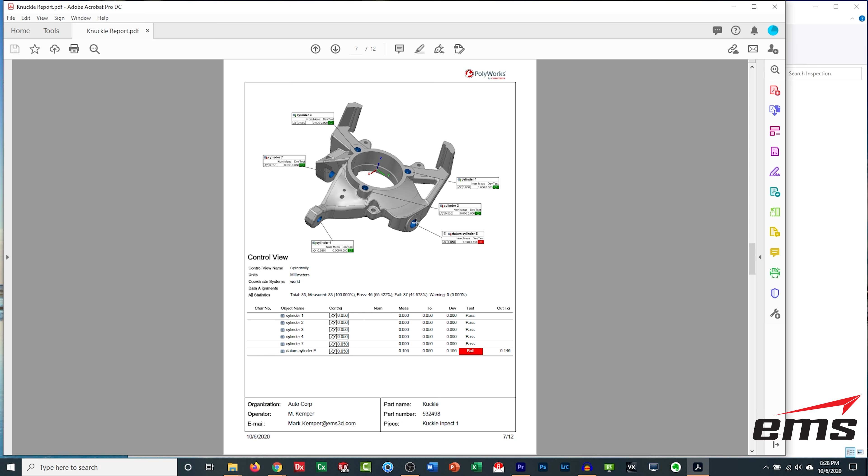This is our cylindricity. Same thing, that datum, that cylinder E, not only is the positional tolerance wrong, but the hole is not round. It's out of round by 196 microns. So definitely have an issue with that hole. Next up, this is our overall dimension from this top surface to the bottom surface, and we kind of saw that in our color map. That is off by 1/4 millimeter. And if that's a critical dimension, obviously we have problems here.

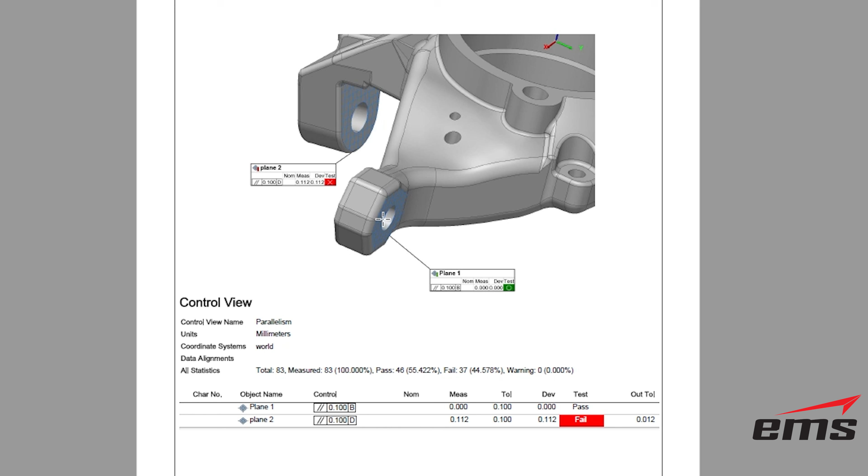Next up, we have some parallelism. So this plane here and the plane on the other side are supposed to be parallel. They're not. So one of those is probably on a wrong angle. And again, if this has to mate or slot in to two other flanges on both sides, it may not fit well. This one as well has to slot in somewhere. And you can see that one is fine.

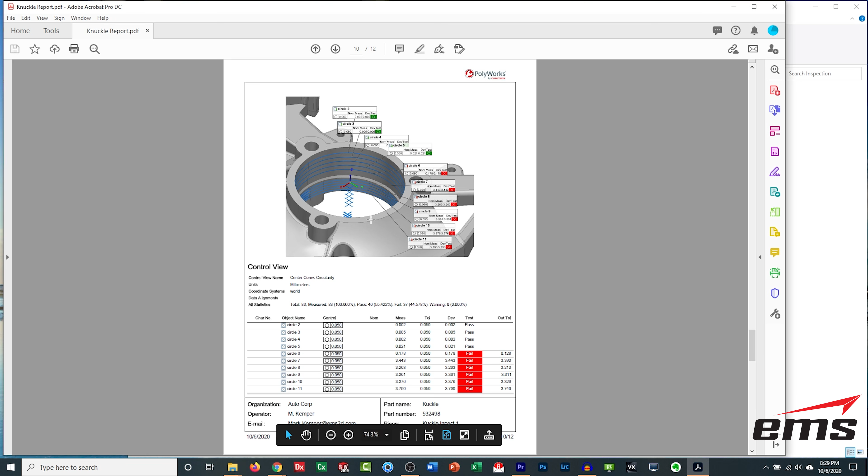Now what we did here, because this actually has a taper like a cone, we cut a series of sections through it. So our top looks okay, but our bottom area down here where this flange is, we've got some real issues. So there's a challenge on this main hub.

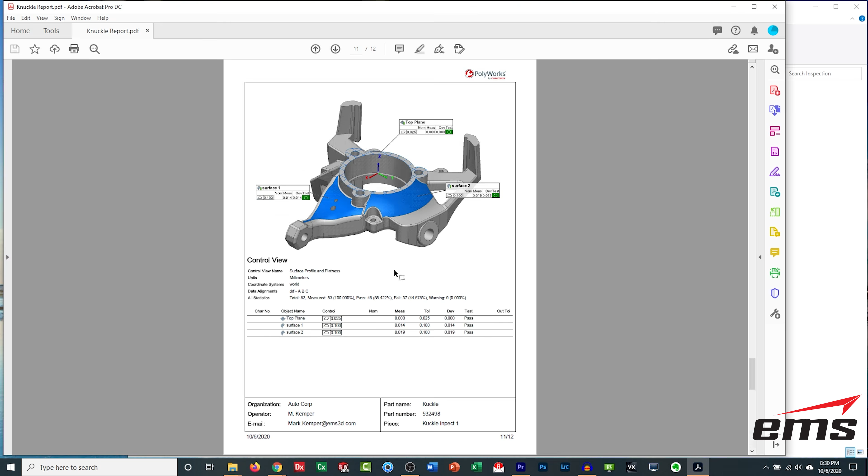We would send this back to the machine shop and say, hey, these parts do not pass. We have some real problems, and probably in their fixturing and their setup, something didn't go right because this part has to be machined in multiple setups. So they're going to have to go back and correct the problem. But you want to find this now before you order 100, or 1,000 of these parts. So that's why we want to do a quick scan and inspect of this and compare it back to our final CAD model.

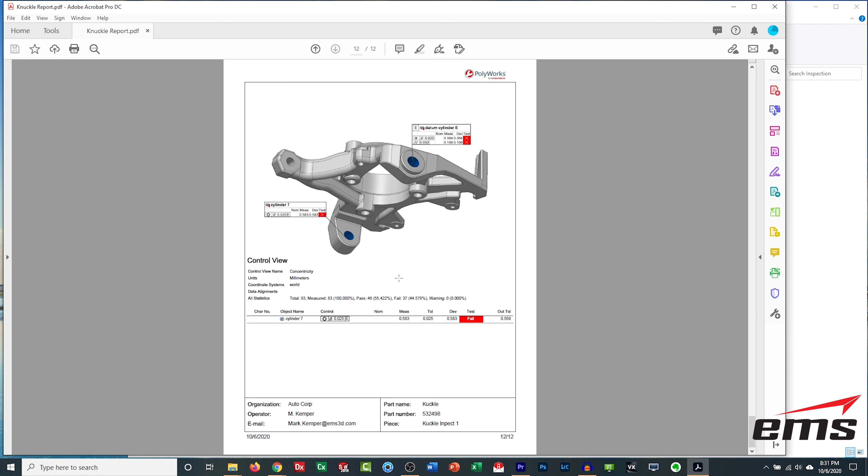So this concludes our video on 3D scanning, CAD modeling, and inspection report generation on a real part. As I mentioned earlier, you can go out on the internet and see a lot of videos of people scanning statues and widgets and people and other things, but that's just not the real world. Manufacturers need to scan and model parts like this. And again, it's not a very big part, but it's got some real complexity in these organic surfaces and just the shape to this. And hopefully you found it helpful to see what the real process looks like.

Because honestly, nowadays, these scanners are so good that that's 10%, 20% of the project. The real work is in the modeling, in the inspection report generation. In our case, not only did we have to reverse engineer it, but we're changing the manufacturing process. And we want to get back to a sketch-driven, feature-based, solid model that is editable. And that is not easy to do, as you saw.

Same with the inspection report. You want full GD&T? Are you just trying to do a first article with a handful of critical dimensions? Or are you trying to call out everything? Do you have some complex call outs, datum alignments, things like that? So hopefully this sheds some light on what it takes to scan a part, model it, and generate an inspection report, again, showing the entire process.